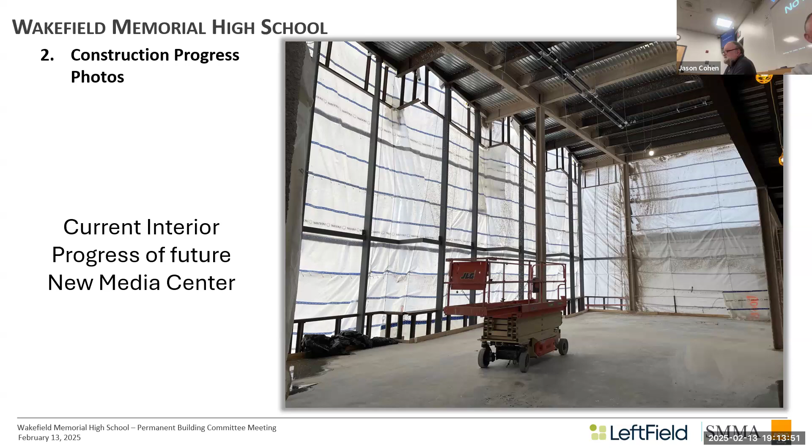But no, it should be like a community room. It's gonna be so cool. In a picture it looks small. It is amazing. Okay, I'm sorry. All right. Sorry, Bart. Phil and Jason and I were blown away. It was pretty impressive. It's really impressive. And when the light comes in, it's gonna be something.

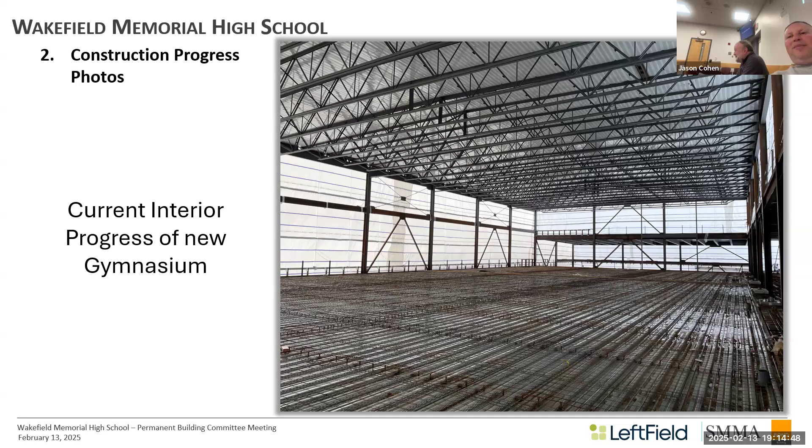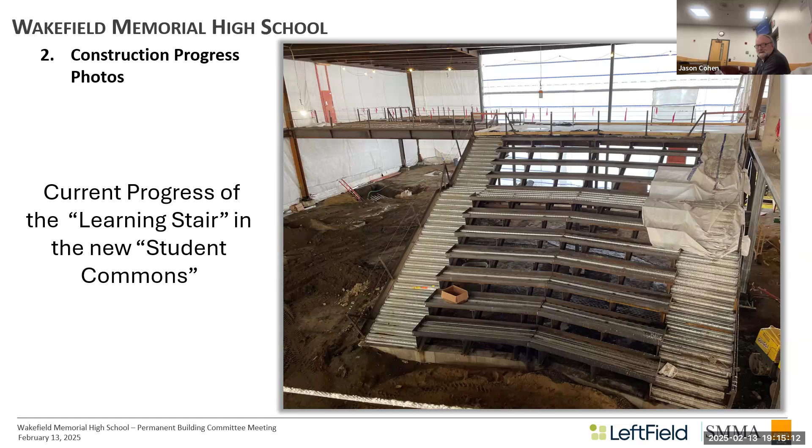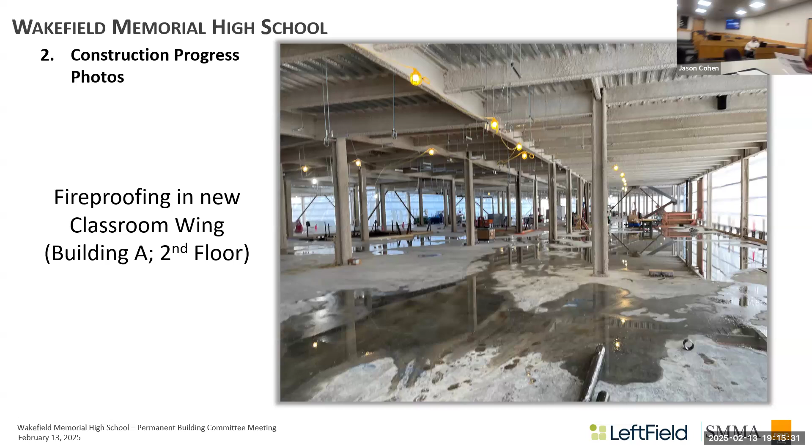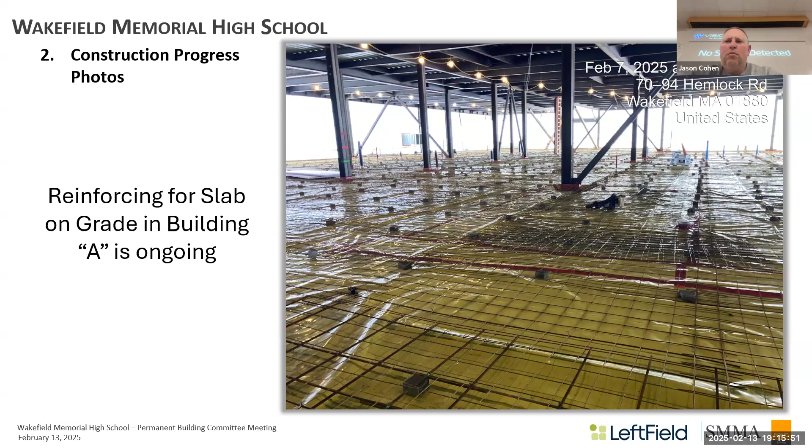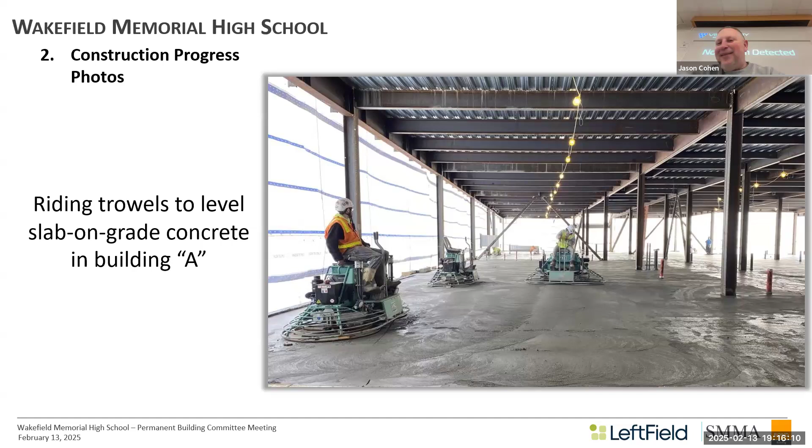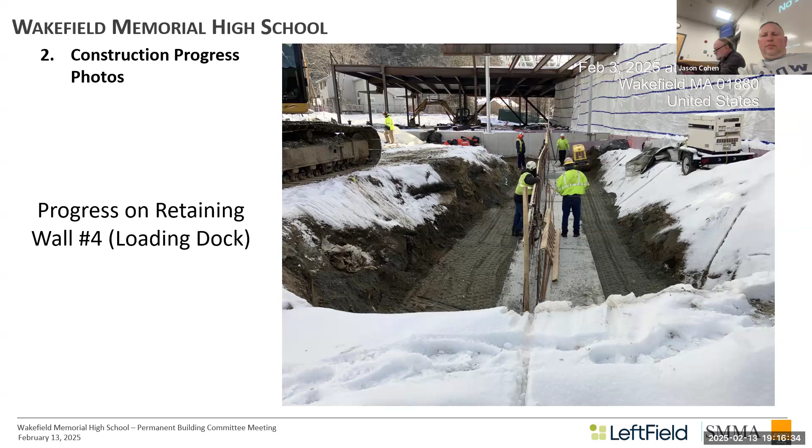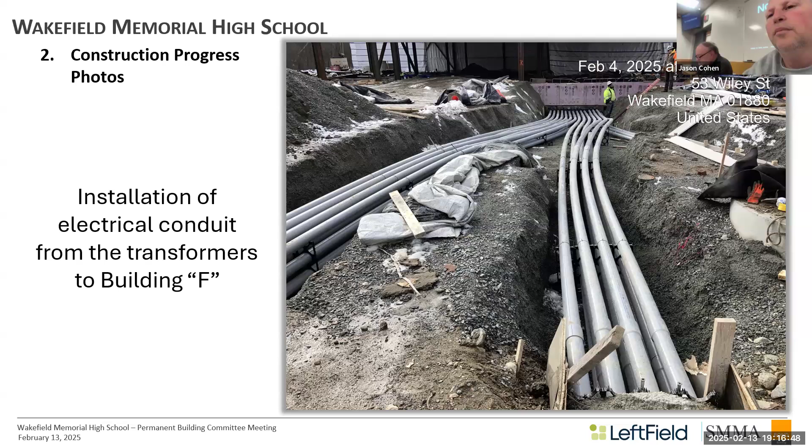This is a picture of the conduits coming in from the transformer pad into building F, to the main line. Okay, so, a quick construction update: bond forces on the roof, continuing roof blocking. We have Quigley on site, working with the utility contractors to do the underground utilities.

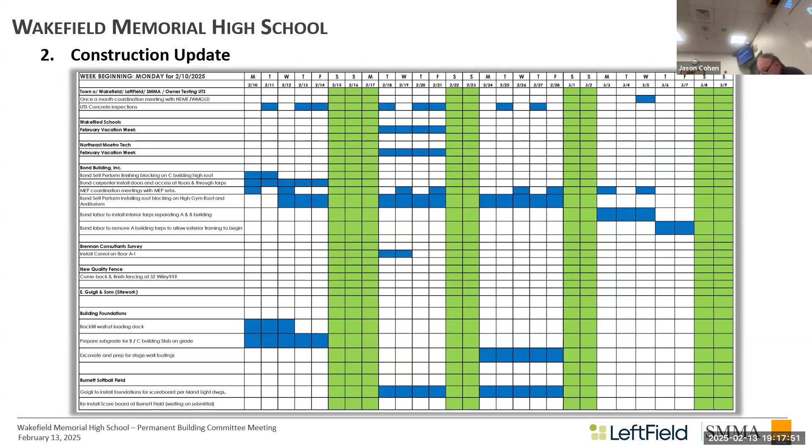Marshall, we are going after slab on grade; we did slab on grade in A building this week. Our next one up is in building B. And hopefully we're gonna get over to the gym and get that board out so we can get on it. Lighthouse masonry mobilized this week. They're building a load bearing wall in the loading dock so we can finish a few beams that need to sit on it. Norgate's in and out, detailing and doing some miscellaneous work. They're just waiting for the tops to drop in building A so they can start adjusting those irons.

Roman iron is gonna start next week on the first stair A1 in area A, since we have that slab on grade ready to go, and they're also gonna do some brick ties and columns in areas D and F. Century, they're on site laying out through A and B, and hopefully they're gonna start in C. They did some top track ahead of the fireproofing. They're gonna be doing exterior framing in March once we can get the tops down and the angles of the iron adjusting. The island fireproofing, they're just working through what they can pick off until we have the roof on.

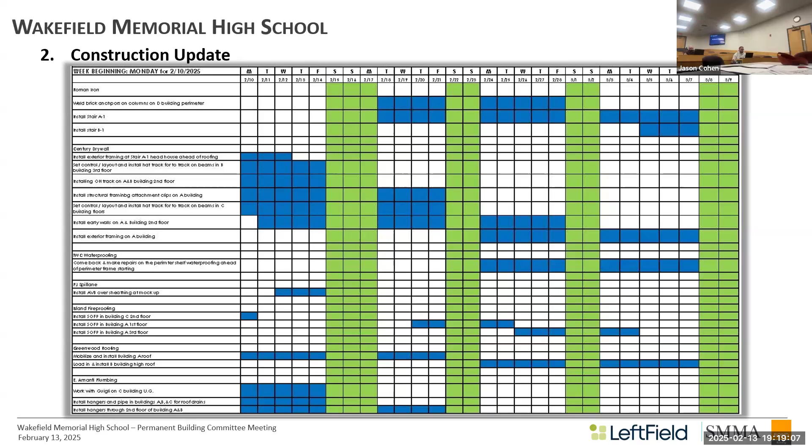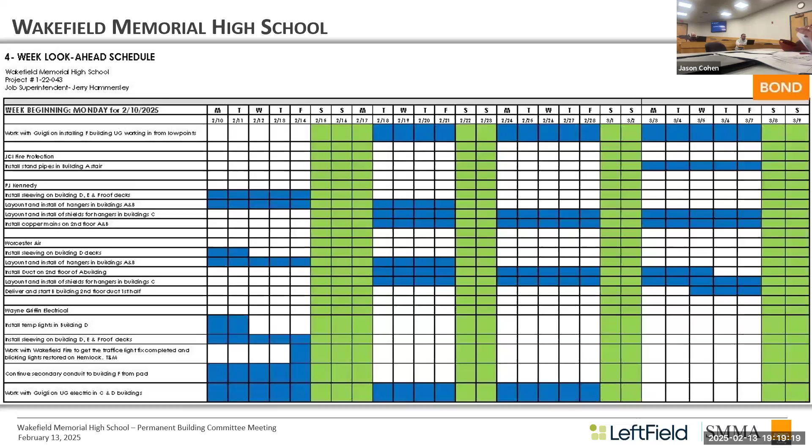Greenwood roofing started this week. They worked Tuesday and Wednesday this week. Today was kind of a washout. Are they putting the insulation down first? Vapor barrier. Insulation. Yeah. Membrane. And then, as I said, Amanti is the plumber and Griffin is the electrician. They're just working through underground and trying to get that done so we can stay ahead. Doing slab on grades, and then in a couple weeks, we'll be starting some duct work in the area. And that's what's going on.

So when we did the walkthrough, Jerry was talking about, essentially, we're gonna start in March some of the exterior, is that right? In building A? Yeah. Okay. Basically, what has to happen is we have to get the roof on, and then with spray fireproof, we need it wrapped and heated. So once that's done and cured, we can drop the tops and then start on the exterior.

Question I had. The mock-up, what do you call it? Mock-up cube. Okay. When is that gonna be available for us to go and see things? I'm just trying to figure out schedule-wise. It's looking like the end of April. We have a lead time issue on the bricks. We'll work through that. They're coming the last week of March, on site the first week of April installing. But right now, it's framed and sheathed. Oh, that's what you guys are building in the parking lot? That's in the parking lot. I've been wondering what that is.

So what is this gonna be? Is it gonna highlight the materials that are being used on the school? It's a combination of all different conditions. It's gonna have a curtain wall, window, a door. It's gonna show the brick, precast, the granite, sunshade, and roof edge. So it's not a performance mock-up? Actually, it is a performance mock-up. So you're doing water testing? Yeah. Is it finish selection as well, or is that already done? It's already done. It's just putting everything together to see them together and review it for construction.

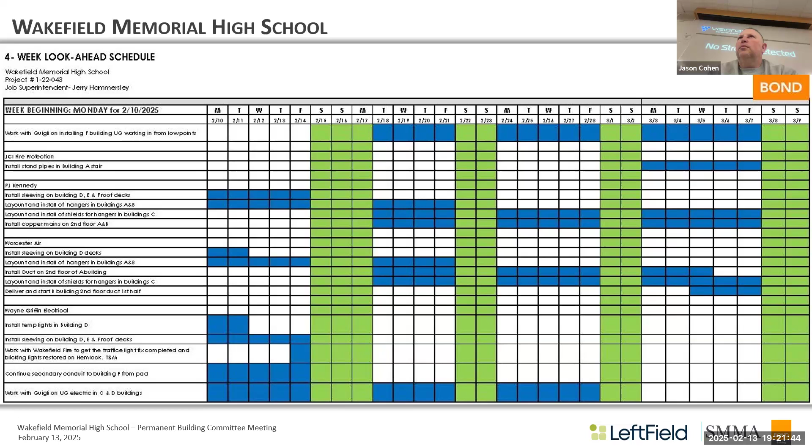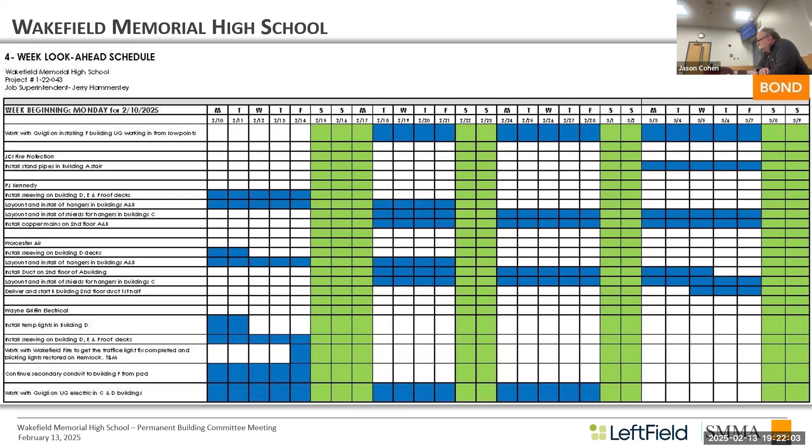Okay, cool. Good to see all the finishes and colors together. We'll also work on constructability issues. Great. So when would we then go and see this? In April? Or in May? Could see it in stages, or a finished product. Nothing's been done yet, right? Well, it's been framed and sheathed, still open, no finished materials to see yet. All right, when would that be? Because maybe we should go and see these things. I can circulate when we're gonna be installing certain materials. But like I said, brick's gonna be the last thing, that's the lead time. The windows, hopefully we're getting the shipping the end of this month. And then curtain wall should be any day now.

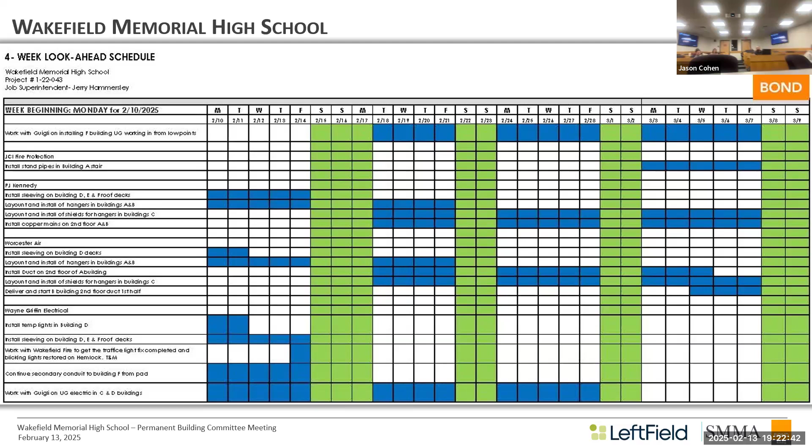It'll be in stages, so it depends if you want to see it at each stage, or you wanna wait till it's all done. What do people think? Yeah, the next on site. When we do walkthroughs, if it's something to look at, we'll look at it. On tours, you can see it. Okay, yeah, we should just do that then. I was curious as to when that's gonna be. That's great. All right. Any other questions with the schedule?